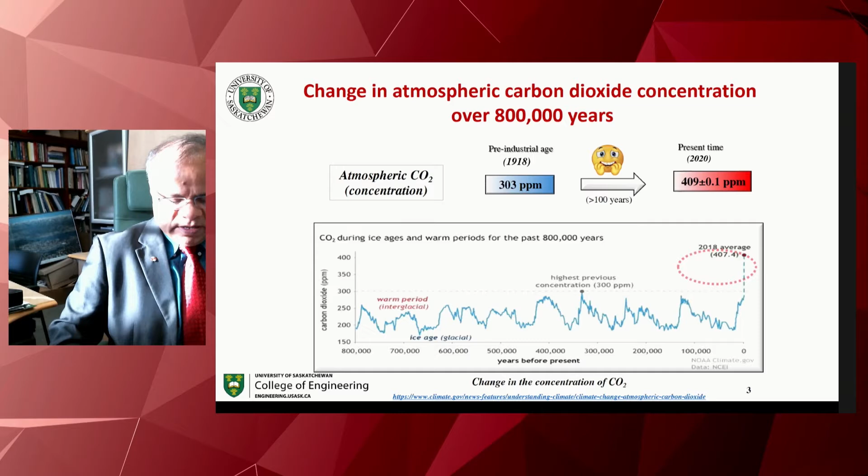If you look more closely at the CO2 concentration and temperature rise, we see that over the last 50 to 60 years there has been a drastic increase in CO2 concentration in the environment, and that translates to a rise in temperature as well.

In the northern hemisphere, during summer months, there is a lot more forest, so due to photosynthesis a lot of this carbon dioxide is sequestered by plants, and the overall CO2 concentration goes down. In winter months there isn't much photosynthesis going on, so CO2 sequestration decreases and CO2 concentration goes up. Nonetheless, there has been a rise in CO2 concentration over time, and also an increase in temperature.

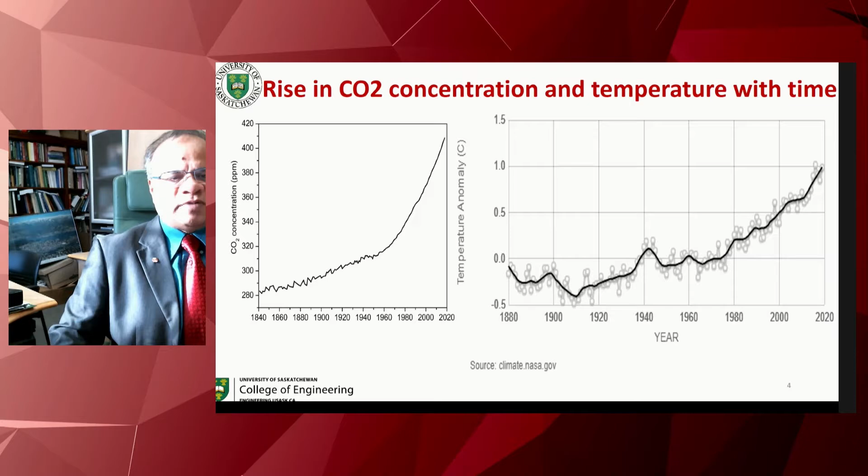This is because of industrialization and more energy consumption around the planet over the last 50 to 60 years or so. Looking at total and per capita CO2 emissions, we find the total emission varies from country to country. For example, China and the USA emit roughly 9 billion and 5 billion metric tons of CO2 per year, followed by India, Russia, Japan, etc.

But when you look at per capita emission, we find United States, Canada, Saudi Arabia, and Australia are on top of the list. We emit a lot more CO2 per capita than many other countries on this planet. This happens because of more usage of petroleum, natural gas, and coal, which are non-renewable energy sources, and their usage going up translates to more CO2 emission.

If you look at the global emission pie chart, China emits roughly 28% of the CO2, the United States about 15%, India about 7%, and the rest of the world outside this pie chart is about 29%.

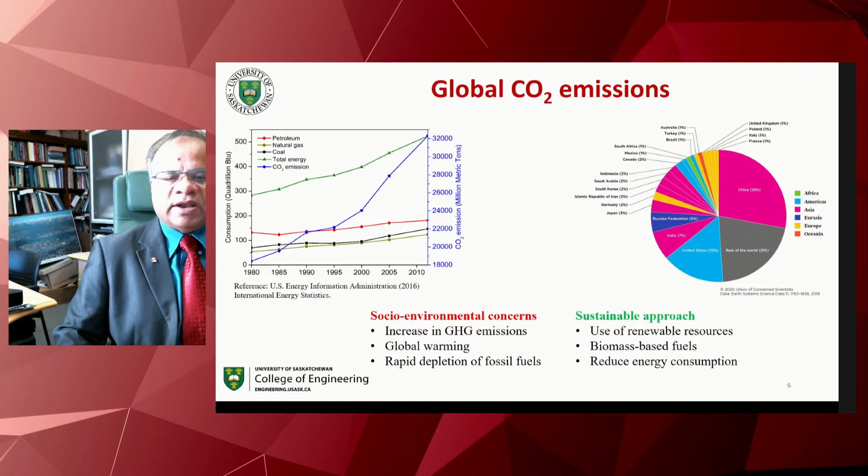This leads to increase in global warming, and also leads to rapid depletion of fossil fuel. So there is a sustainable approach, that is use of renewable resources, bio-based fuels, and also we can look at reducing energy consumption. And when you look at the global fossil fuel consumption, it's quite uneven on the planet.

For example, China, United States, Russia, Canada, and a few other countries use a lot more fossil fuel in total compared to many other countries on this planet. And fossil fuel consumption and CO2 emission go hand in hand. For example, United Arab Emirates, Canada, United States, and Australia consume more fossil fuel, and therefore have more emission of CO2 per capita.

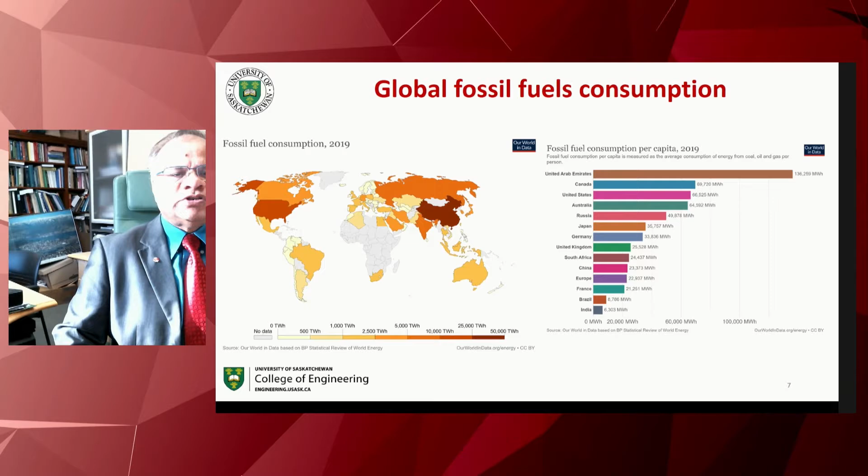When you look at the world's population growth and energy consumption, by about 2100 we'll have more than 12 billion people, up from 7.8 billion at this point. And over the next 20 years or so, we'll have about 77% more non-renewable energy consumption, in spite of growth in renewable fuel production and implementation.

So when you look at this fossil fuel usage, we find that it is non-uniformly distributed over this planet. There is high emission of oxides of sulfur, nitrogen, and carbon, and it accelerates global warming and depletes resources. Over the last 20 years or so, there has been an increase of 0.5 degrees C in the temperature of the globe.

Of all these greenhouse gases, about 81% comes from carbon dioxide, 10% from methane, and another 9% from other sources. Methane has 21 times more greenhouse gas effect compared to carbon dioxide, so we really need to be mindful of CO2 emission and methane emission as well.

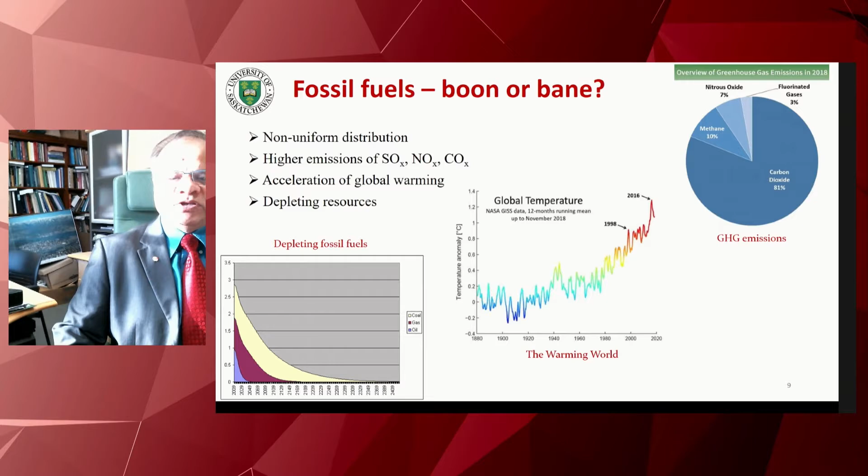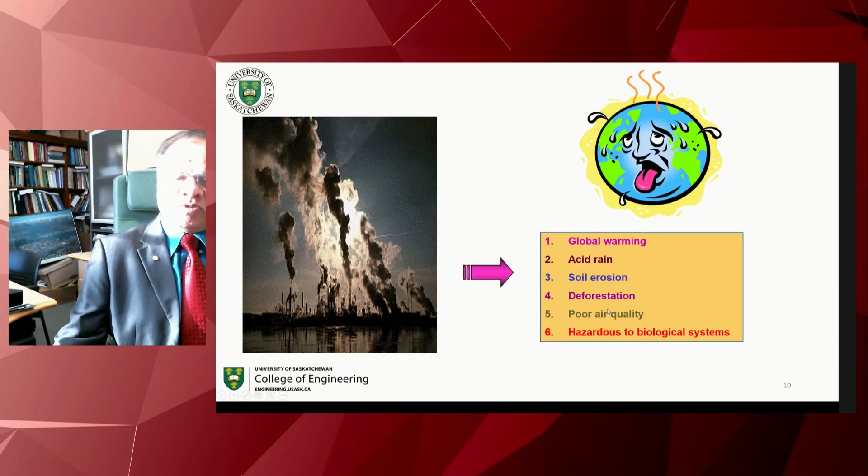If you look at this cartoon here, when we emit a lot of pollutants, including carbon dioxide, to the environment, it not only leads to global warming, it also leads to acid rain, which causes soil erosion, leads to deforestation, and leads to poor air quality. Most importantly, it is hazardous to human and animal health.

So let's look at Canada's commitment to sustainability. Under the Kyoto Protocol, Canada committed to reduce greenhouse gas emission by 6% by 2012, compared to the 1990 level of 461 megatonnes. Now we are at 720 megatonnes of CO2 greenhouse gas production. So none of the countries on the planet could really meet the Kyoto Protocol.

Then in 2015 we had the Paris Agreement. Under this agreement, Canada pledged to reduce its greenhouse gas emission by 30% below 2005 levels by 2030. Developed countries, including Canada, are committed to spending at least $100 billion a year between 2020 and 2025 to help emerging economies deal with the effects of climate change. And none of the developed countries has really spent that kind of money.

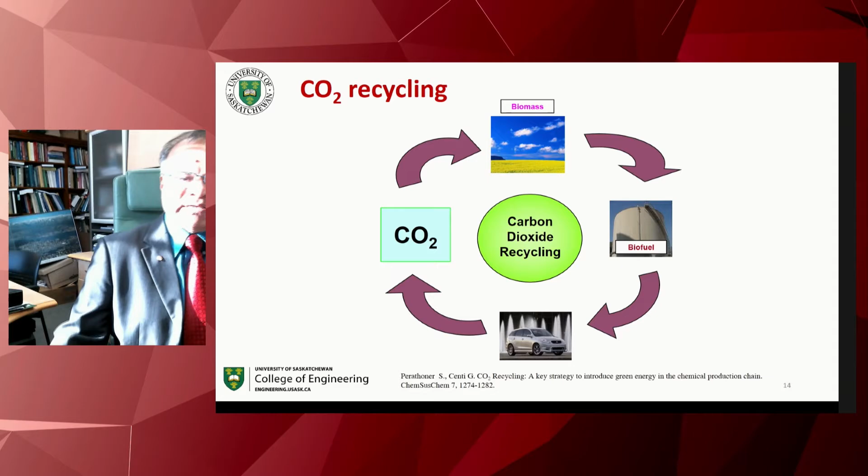So if you look at this particular slide, you see if we use the biomass for energy source, we basically sequester carbon dioxide through photosynthesis to grow the plants, and the plants can be transformed to biofuel to fuel the vehicle, and we can burn that fuel to emit the carbon dioxide that is again taken out by the plant. So this particular process is more or less carbon dioxide neutral process.

And now let me switch to the biomass, a possible solution for world energy crisis. If you compare the petroleum derived fuels with first and second generation fuel, we find that petroleum refinery gives diesel, petrol, kerosene, jet fuel, etc. And when we started working on the first generation fuel about 25 years ago, we find that we can also produce biodiesel and corn ethanol, etc. But we had food versus fuel issues, and it was non-sustainable.

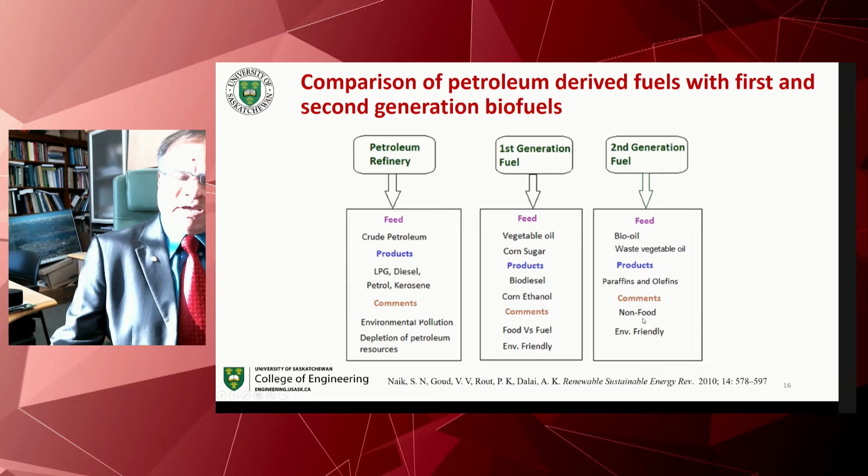And for that reason, we jumped to the second generation fuel from lignocellulosic biomass, where you can also produce biodiesel, ethanol, etc., and we are not competing with the food. And they are both, of course, first generation and second generation fuels are environmentally friendly.

So biomass can be a possible solution for world energy crisis because they are renewable, they are clean, they lead to very low emission, they are carbon neutral, and they're more or less uniformly distributed over this planet in all the countries, unlike the petroleum sources and non-conventional energy sources. And we also have to be very mindful of the food versus fuel issue.

And here we have examples of the agricultural residue, sewage residue, municipal solid waste, animal residue, industrial residues, and forest residues. And in the world, we roughly produce about 220 billion tons of biomass every year. And we have really opportunity to turn those materials to fuel.

And if we don't do that, and we let them rot in the environment, they also produce a lot of methane, which has 21 times more greenhouse gas effects. And we are not doing any good to environment if we don't utilize this resource every year as we produce it.

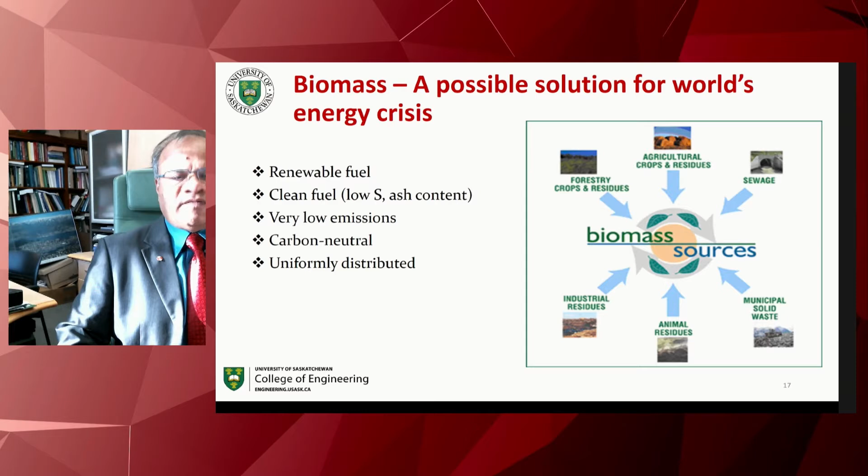So now let me bring your attention to renewable energy and biofuels. If you look at the graph on the left, over the last 20 years or so, we have almost more than doubled the renewable energy generation. What I mean is the hydropower, wind, solar, biomass, etc. And when you look at the biofuel production, we have basically gone from 200 terawatt hour to 1,000 terawatt hour, and that's about a 5-fold increase.

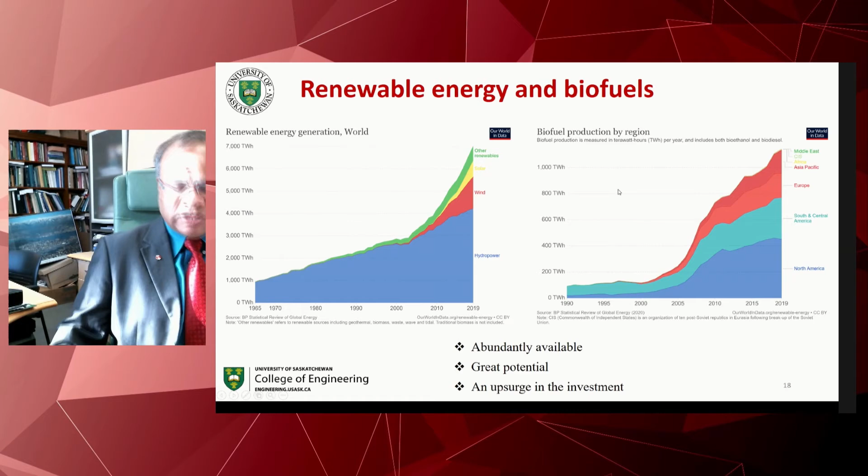And we are also basically looking at producing more biofuels from biomass. And this is only about 15% of the total renewable energy. And I believe that this percentage of energy production from biofuel, from biomass, will increase drastically down the road.

And let me again bring your attention to Canada. We have about 0.5% of world population living in Canada, but we have more than 9% of world forest. And when you look at the annual available biomass from forestry and agricultural sector, it's about 143 million tons of carbon per year.

That can translate to more than 1,500 terawatt hour of energy. And right now in Canada, we are producing roughly 16 terawatt hour of energy. So we have opportunities to go more than 25-fold increase in biofuel energy production with the amount of biomass available in this country, in our country.

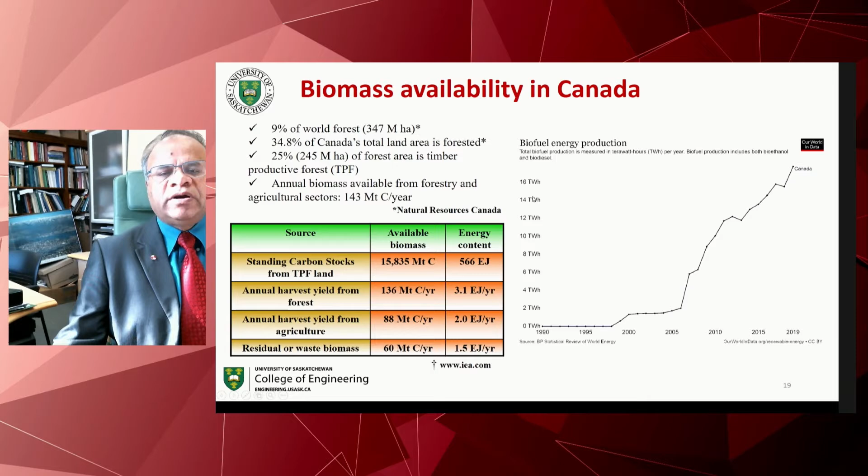And the residual and waste biomass, you can see that about 60 million tons that can translate to more than 400 terawatt hour, and that is also quite substantial. And if you look at the renewable fuel standard and low carbon fuel standard in Canada, the federal government has mandated 5% ethanol and 2% biodiesel. In Canada, we use roughly 25 billion liters of diesel fuel every year, and at 2%, we need about 500 million liters of biodiesel.

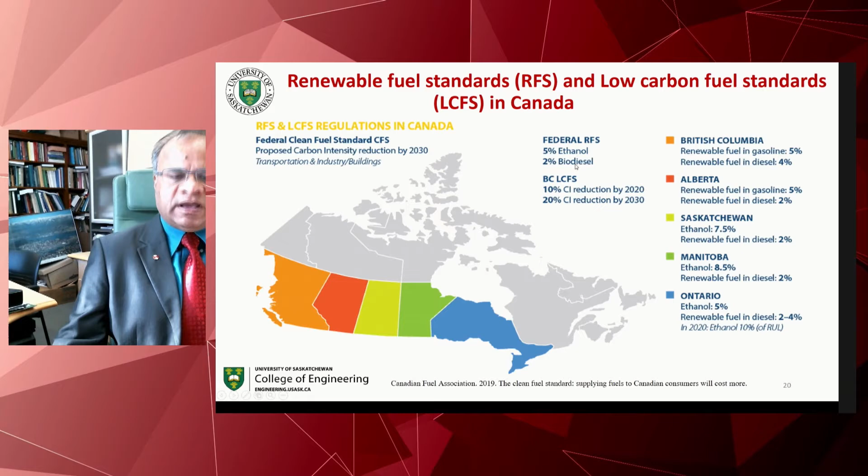And there are 21 companies in this country, in our country, which produce more than 450 million liters of biodiesel. And when you look at all these different provinces, they are more aggressive than the federal mandate. For example, in Saskatchewan, we have a mandate of ethanol for 7.5% as compared to 5% by federal government. And if you look at Ontario, the renewable fuel in diesel varies up to 4% as compared to 2% mandate by the federal government. And these are all really, really good signs.

And what is the trend in growth of biofuel sector? We are more targeting the liquid fuel. Why? Because they have more energy density. They can serve the fuel for jet engines. And by the way, the aviation industry emits about 2% carbon dioxide of total emissions in the world. So if you put more biofuels in the jet engine, then we'll be that much more sustainable and reduce the CO2 emission.

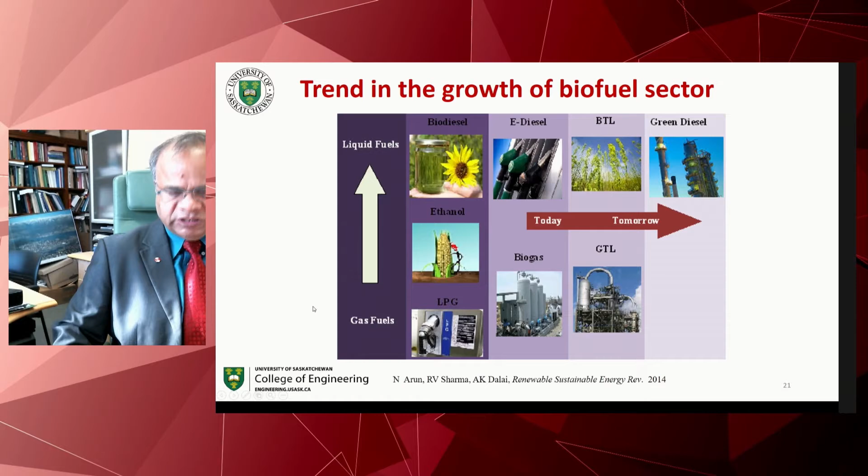Also looking at the production of this liquid fuel more from lignocellulosic biomass than food sources. So what is lignocellulosic biomass? It basically contains cellulose, hemicellulose, lignin, extractives, and these are present in grass, wood, agricultural residue, etc.

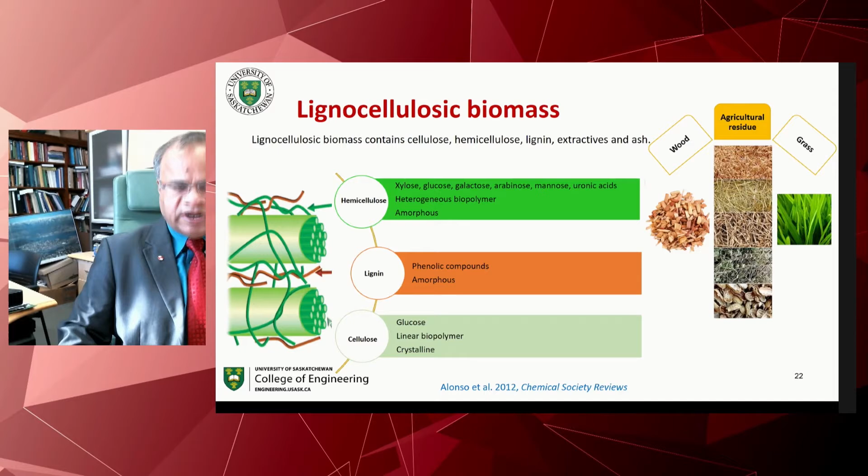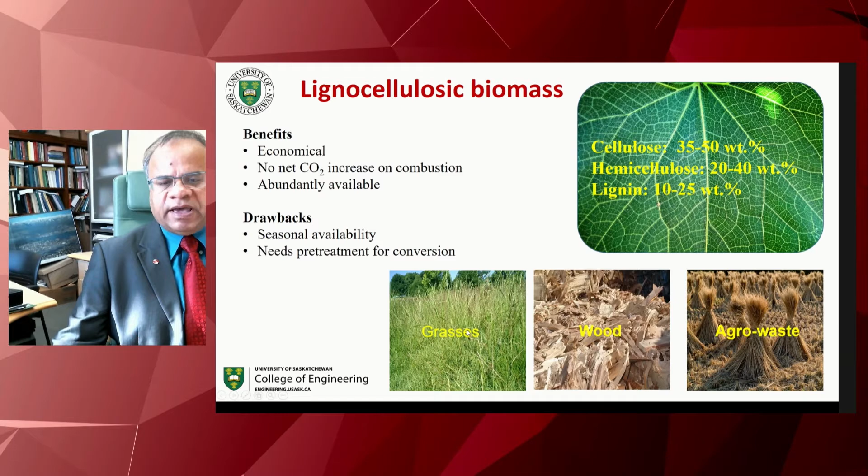In case of lignocellulosic biomass, we have about 35 to 50% cellulose, 20 to 40% hemicellulose, and 10 to 25% lignin. By using this biomass, we can economically benefit, there's no net CO2 increase on combustion, and they're abundantly available. The drawbacks are they're seasonally available and need pre-treatment for conversion. Examples are energy crops, wood, and agro waste.

So what is an energy crop? It's any plant grown as a low cost, low maintenance harvest used for making biofuels or combusted for its energy content to generate heat or electricity. They are fast growing, short rotation, and high yield. They will be able to grow in marginal or degraded land. They require less intensive agricultural practice, and there is no competition with food crops for nutrients or sunlight.

With annual availability of energy crop in Canada up to 17.3 million tons, we have a potential to produce about 4.7 billion liters of ethanol per year from this material. Not only can we use it in-house, the Canadian mandate can go from 5 to 10% ethanol, but we also will be able to export a lot of this lignocellulosic derived ethanol to other parts of the world and make lots of money as well. Now let me switch the discussion onto biomass conversion technology for clean, sustainable energy production.

So there are three different pathways: chemical conversion, biochemical conversion, and thermochemical conversion pathways.

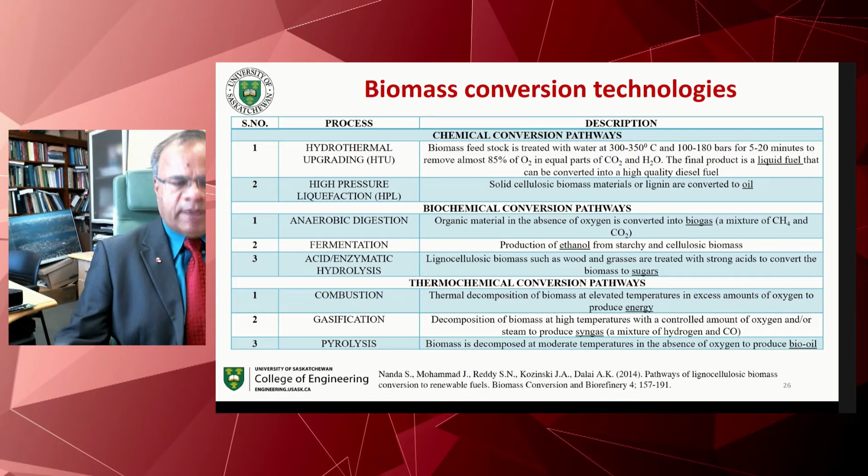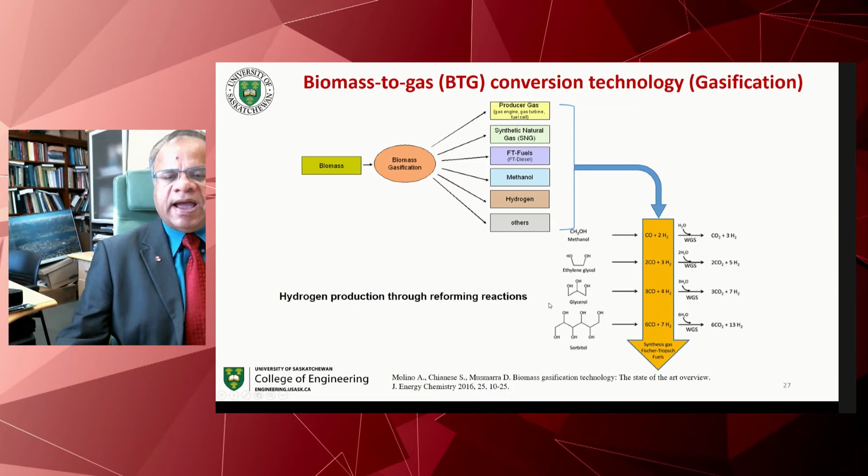Once we gasify the biomass into different components, we can use the reforming reaction by adding some catalyst and water to produce high quality hydrogen from these intermediate products.

In case of biomass to liquid conversion technology, let's talk about pyrolysis. It's basically a thermochemical decomposition process at high temperature in the absence of oxygen to produce oil, biosolids, and gas. It's divided into slow, fast, and intermediate processes depending on the residence time of biomass in the reactor, which can vary from seconds in fast pyrolysis to an hour in really slow pyrolysis. In this process, we get different amounts of oil, char, and gas depending on the temperature and the residence time of the biomass in the reactor.

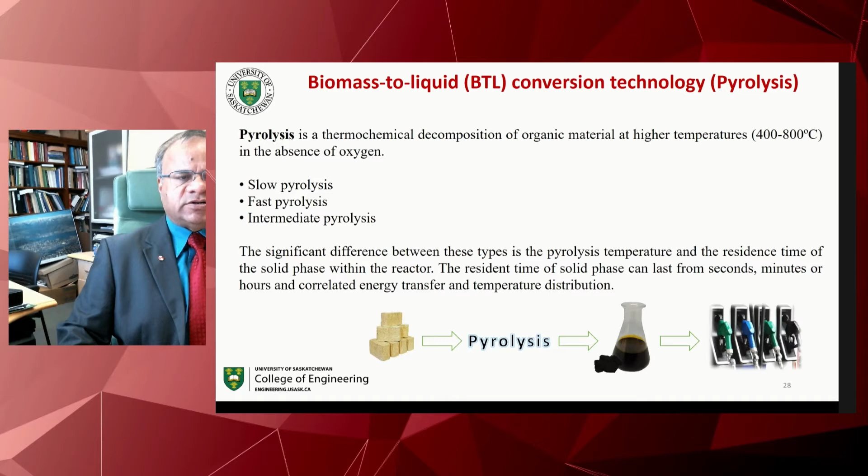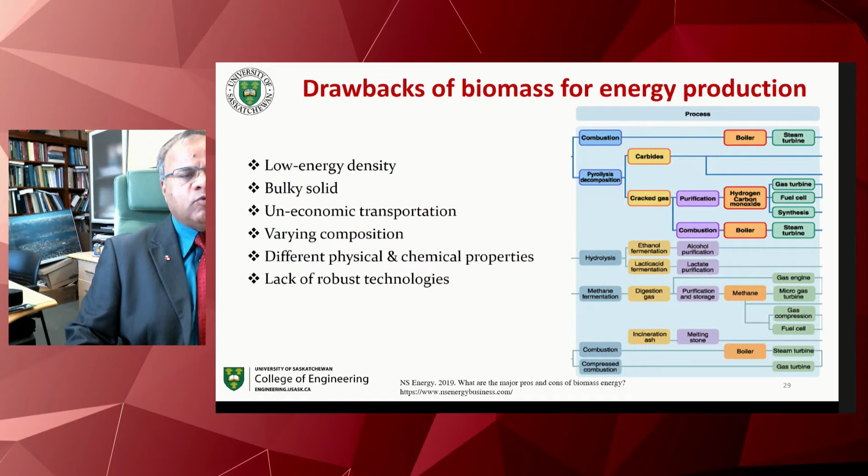Of course, there are many drawbacks of biomass for energy production. They have low energy density, they are bulky solids, therefore uneconomical for transportation over long distances, they have varying composition, different physical and chemical properties, and in many cases there is a lack of robust technology mostly in developing and underdeveloped countries.

So like any other industry, the biofuel industry depends on the feedstock, on processability, and also many other factors, including government incentive and interest from academia and industrial activities.

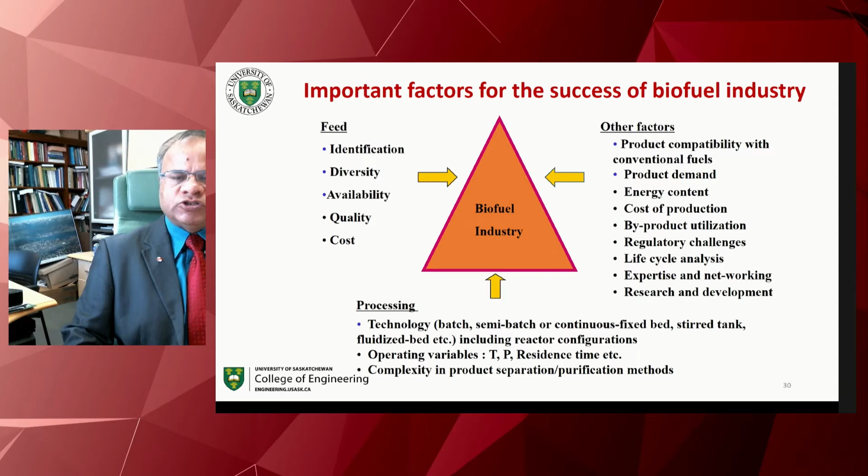Now let me switch to supercritical water gasification and hydrothermal liquefaction challenges and opportunities.

If we are not familiar with supercritical water gasification technology, basically at a critical point, which is about 374 degrees C and 22.1 megapascal, beyond this the water is called supercritical water. In this case, the ion product, density, dielectric constant, viscosity, everything is very, very different than that of water. So what is the advantage of using supercritical water gasification, even if it's a bit energy intensive? Some of this energy can come from biomass itself and also from solar and nuclear sources.

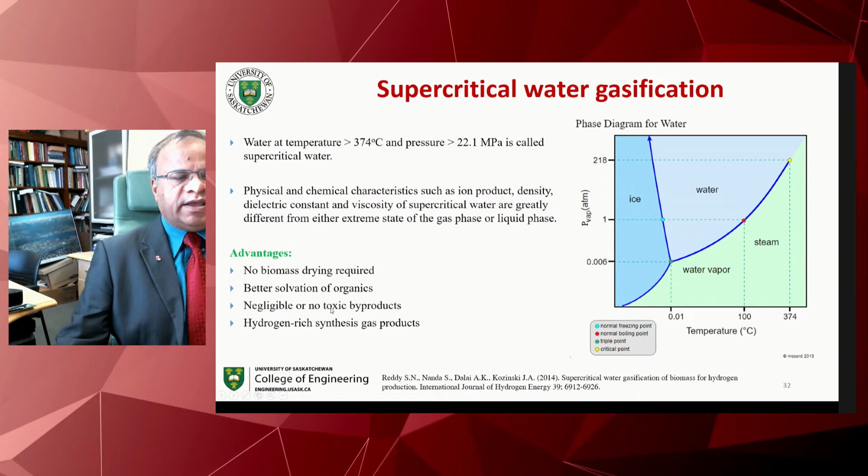The advantages are that no biomass drying is required, because drying is expensive, and they have better solvation properties, negligible or no toxic byproducts, and they produce hydrogen-rich synthesis gas.

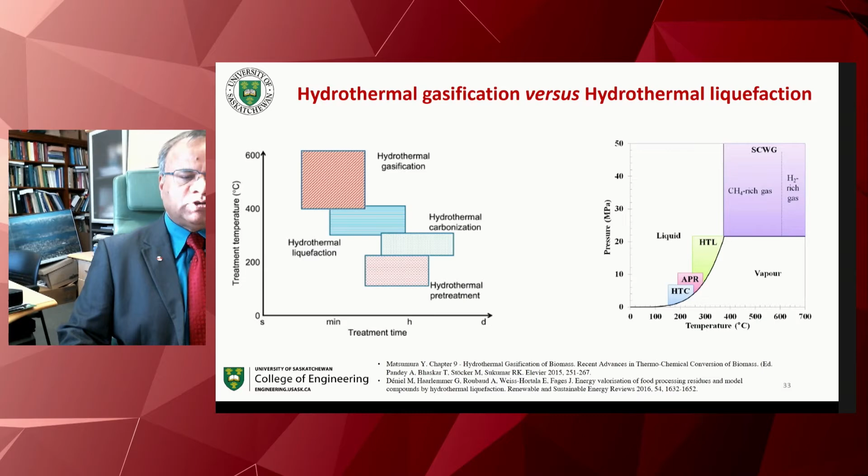On the left, we see temperature versus treatment time and how hydrothermal gasification leads to production of more gas. Hydrothermal liquefaction produces more liquid, hydrothermal carbonization produces more biosolid like biocoal, and hydrothermal pretreatment removes moisture and volatiles from the biomass to increase its heating value and reduce transportation cost to some extent.

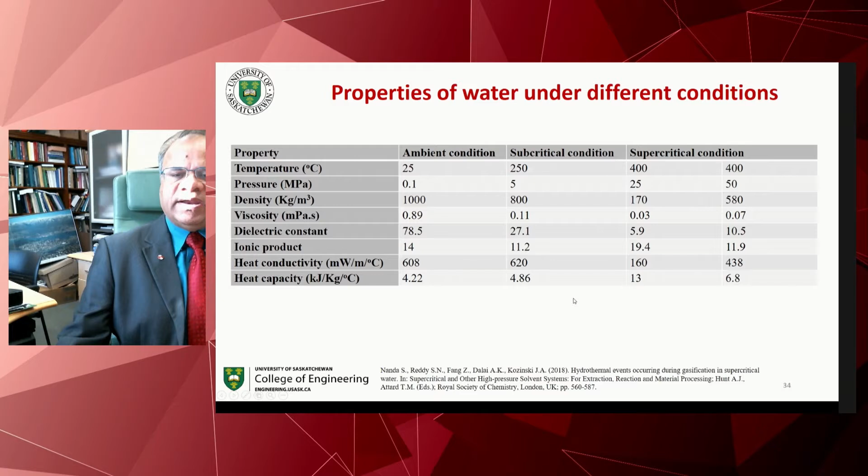We basically rely on variation of these properties to convert biomass to liquid or gas as needed, so we use different kinds of reactors.

When we started the work about 20 years ago, we looked at the different phase behavior in a hydrothermal reactor using a diamond anvil cell at the Canadian Light Source.

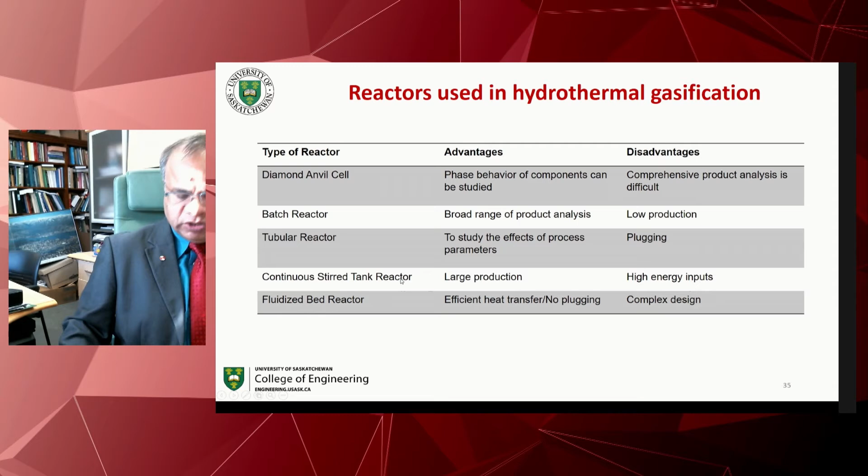We have been using batch reactors and tubular reactors to look at the product yield and conversion of biomass to these different products. Of course, continuous reactors, fluidized bed, and stirred tank reactor can be used when you scale up this process to industrial production. Now let me switch to our own research on clean energy production from biomass.

Over 25 years ago, I was trained as a petroleum engineer. When I joined this university in 1996, I was asked to generate research on clean energy production from biomass, with the Canada Research Chair position.

So I looked into this, and in those days, clean energy production from biomass was not on the radar of the province or the federal government, and we really have come a long way. At that time, there was no funding available. Now there is plenty of funding available, a lot of passion to contribute to this research, and now we also get very high quality students to work with us.

Now let me talk about the hydrothermal liquefaction process. This is basically thermal depolymerization of biomass at relatively high temperature and pressure, with or without catalyst, to produce bio-oil. In this process, high moisture, low energy material is converted to low moisture, high energy material.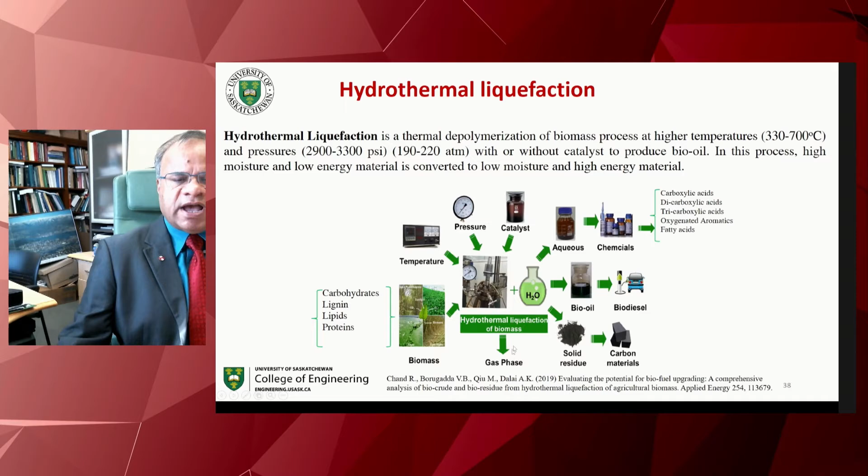These chemicals can be extracted. Bio-oil can be converted to biodiesel, and solid residue can be converted to high carbon, high quality carbon material. We also get gases that can be burnt on site to supply the energy we need for this process.

In this particular example, we are looking at about 15% non-edible agricultural material, adding 85% water. If it has some inherent water, we just add balanced water to the process and increase the temperature and pressure. In a short period of 1 hour, we get 4 different products: about 85% aqueous, 5% bio-oil, 8% solid residue, and 2% gas phase.

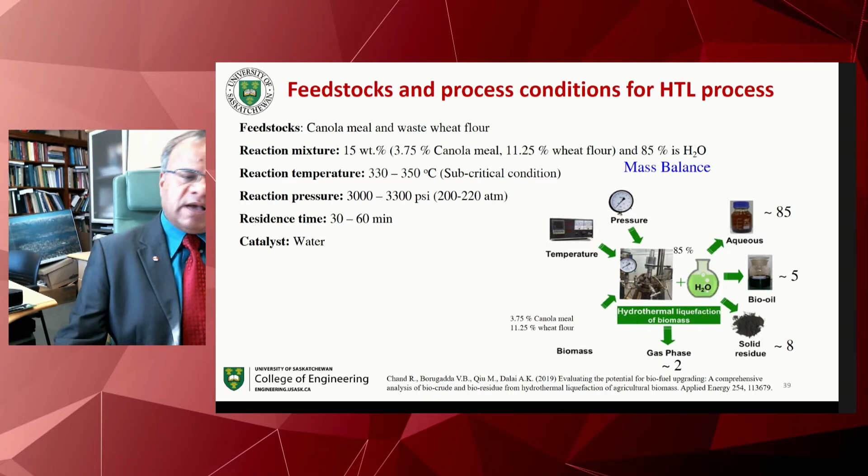I just wanted to bring to your attention that when work started on petroleum in Alberta, for example, the oil sands had only 10% bitumen, and with contribution from the government, about $800,000 was invested around 1975.

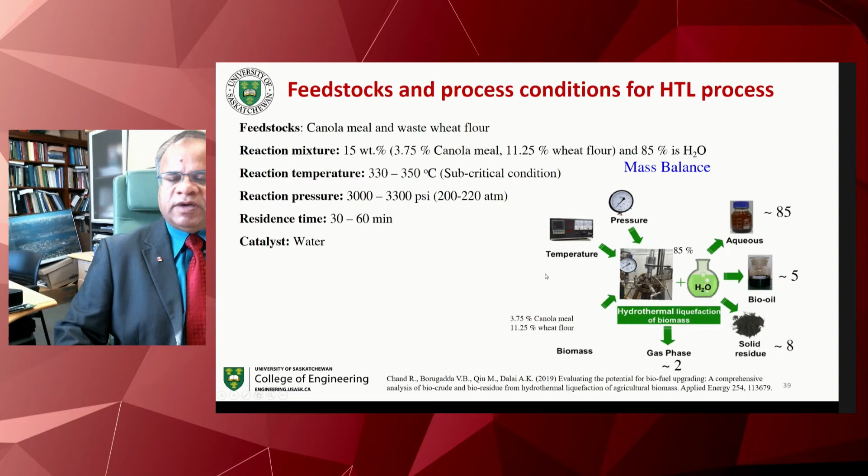Now it has led to a billion-dollar industry. In this particular technology, when you look at only 15% biomass that we are putting in, we are getting 5% bio-oil, which is about one-third of that material going into the oil, which is very useful to transform into transportation fuel.

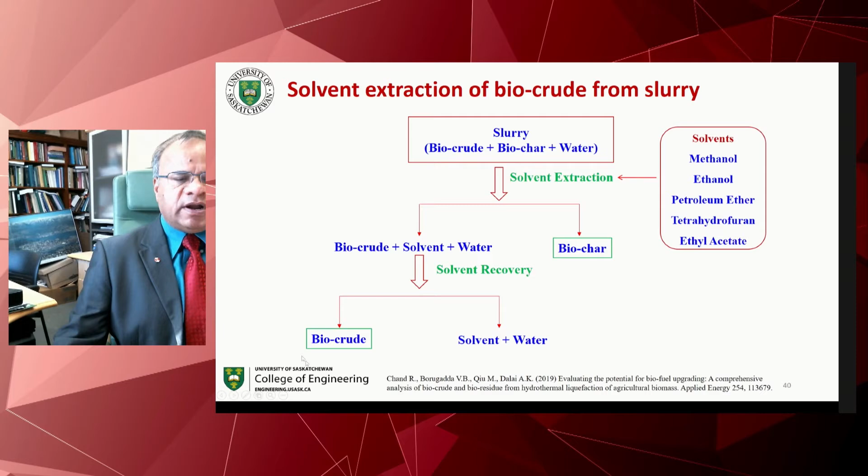So once you get the bio-crude, we add different solvents to separate the biochar from the bio-crude, solvent, and water. By distillation, we can separate the solvent and water and then produce the bio-crude that we need to upgrade.

This is a very interesting slide in the sense that the heating value of this crude is about 36 to 40 megajoules per kilogram, as compared to 14 to 18 megajoules per kilogram for the biomass. It has a low oxygen content, about 9%, has very negligible ash content, and it's oxidatively stable up to 3 months at room temperature.

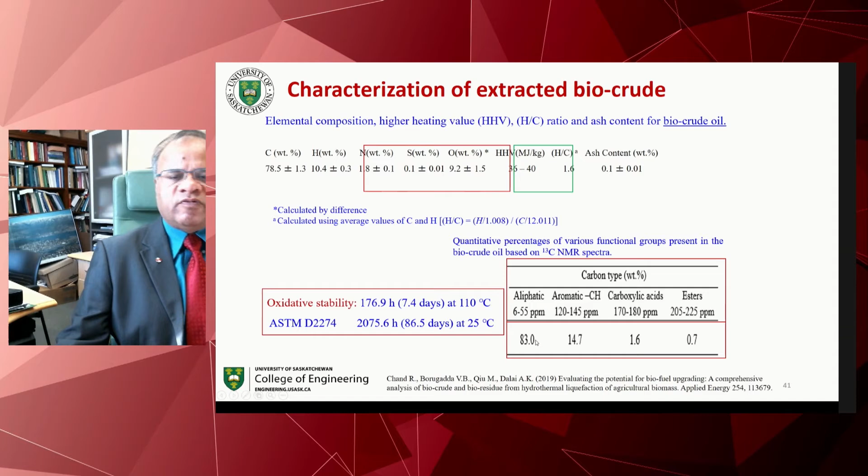All this high calorific value is because of the large amount of aliphatic hydrocarbons present in the bio-oil. When you look at the boiling point distribution and compare this with the petroleum fraction, we find that more heavy gas oil and light vacuum gas oil materials are present, the range of hydrocarbons present in this bio-oil, and that's really a good sign.

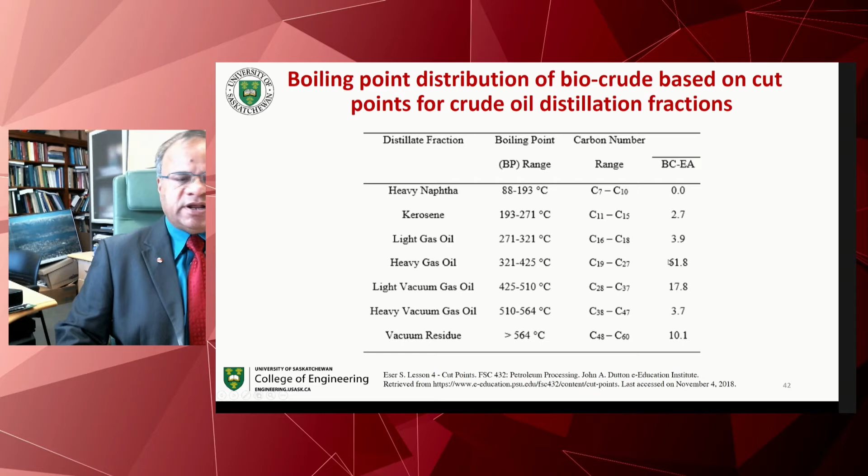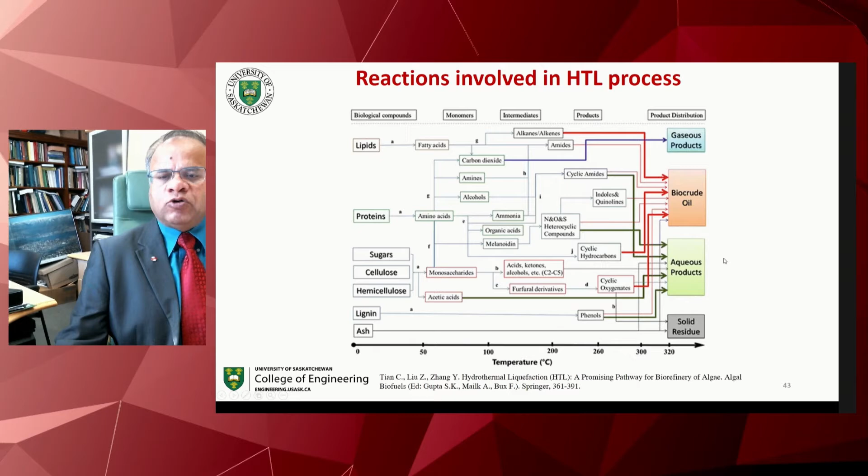This is a bit complex, but just wanted to bring to your attention that many reactions take place in the hydrothermal liquefaction process in a short period of 1 hour, when lipids, proteins, sugars, cellulose, hemicellulose, lignin, etc. go through this particular process. There are many intermediates, but nonetheless, at the end, we get gaseous product, bio-crude oil, aqueous product, and biosolid, or solid residue.

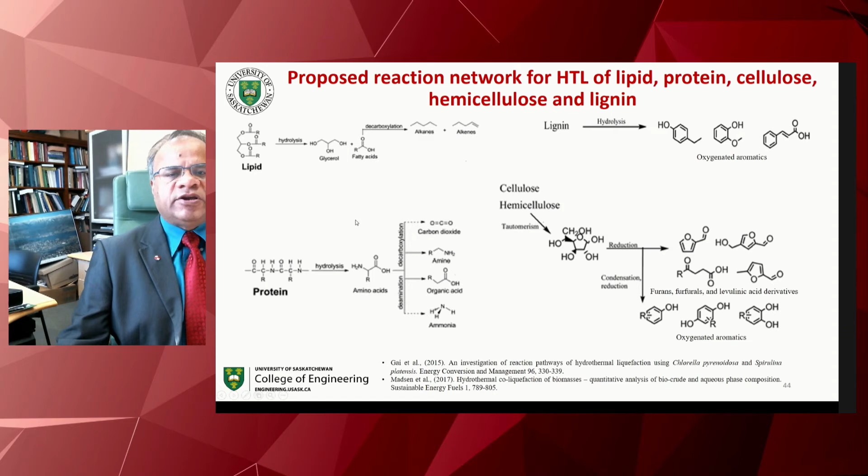In this particular work, we produce basically alkenes, organic acids, oxygenated aromatics, furans, furfurals, etc., from the lipid, lignin, cellulose, hemicellulose that are present in the lignocellulosic biomass.

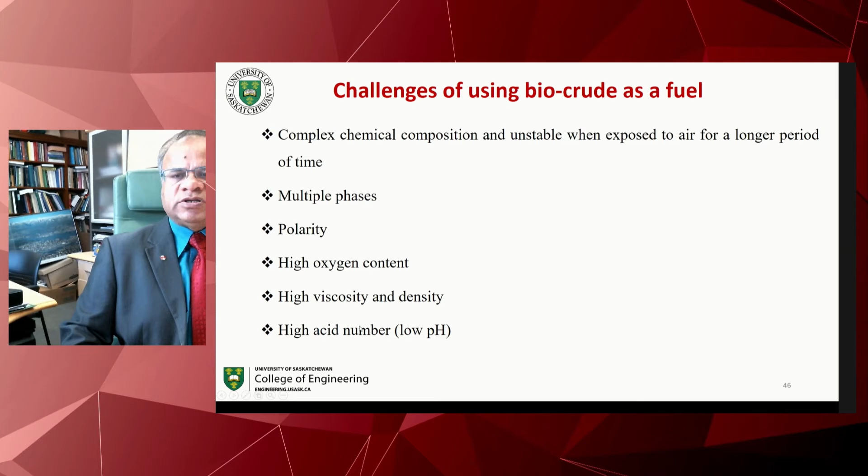Of course, there are many challenges of using bio-crude as a fuel because they have complex chemical composition, multiple phases, different polarity, high oxygen content, and high viscosity and density because of the aliphatic hydrocarbons, and then high acid number because of the presence of carboxylic acid in this material. So we have to overcome these challenges.

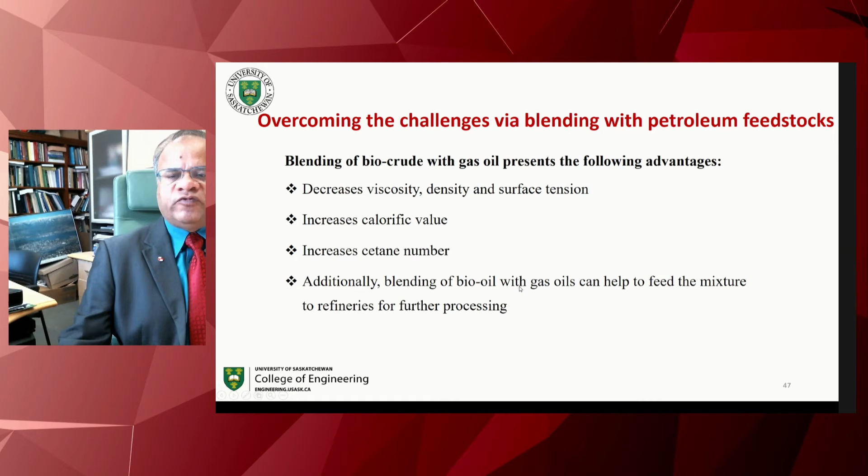What we can do is basically blend it with petroleum feedstock and send it to a petroleum refinery for further processing. When you blend it, it can decrease the viscosity, density, and surface tension. It can increase the calorific value. It can increase the cetane number. And also blending, as I mentioned, can help feed the mixture to refinery for further processing.

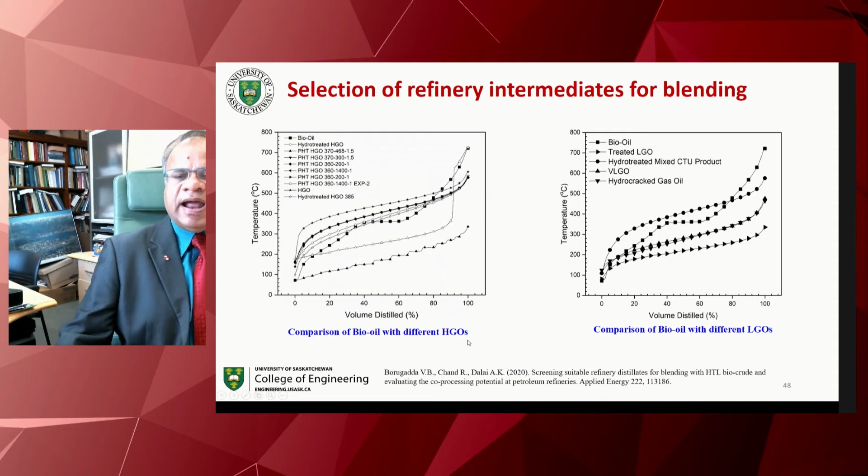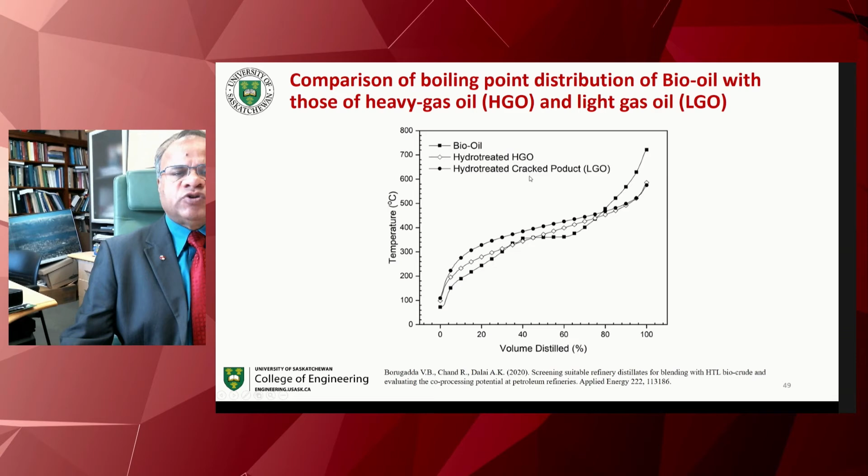For that reason, we looked at different refinery intermediates and found that the boiling point distribution basically falls in different heavy gas oil and light gas oil ranges of materials, as you see in this slide. When we summarize it and look more closely, we see that the bio-oil distribution with the solid square in this graph matches very closely with the hydrotreated heavy gas oil or hydrotreated cracked product from petroleum sources.

We also looked at blending of the bio-oil with heavy gas oil, and we found that we can blend up to 10% in 90% heavy gas oil at 120 degrees C in about 12 hours. We also can blend at different amounts of bio-oil at 120 degrees C at different timings as well. This is really a good sign that we can create a homogeneous mixture of bio-oil with heavy gas oil and feed it into a refinery for upgrading.

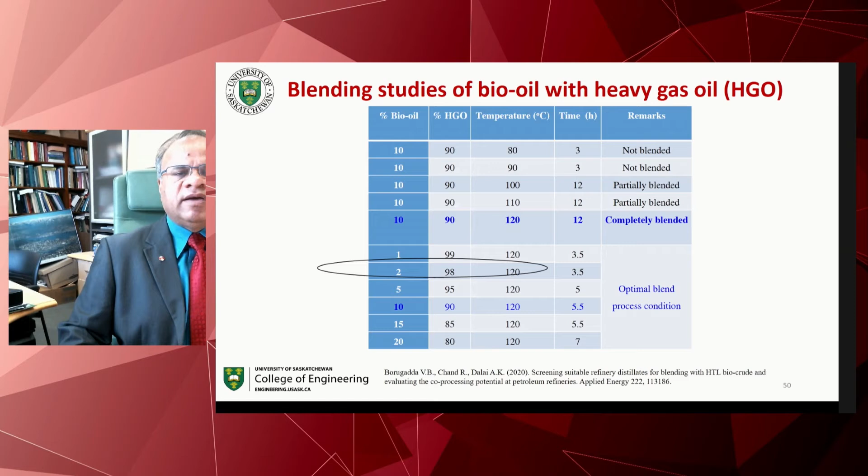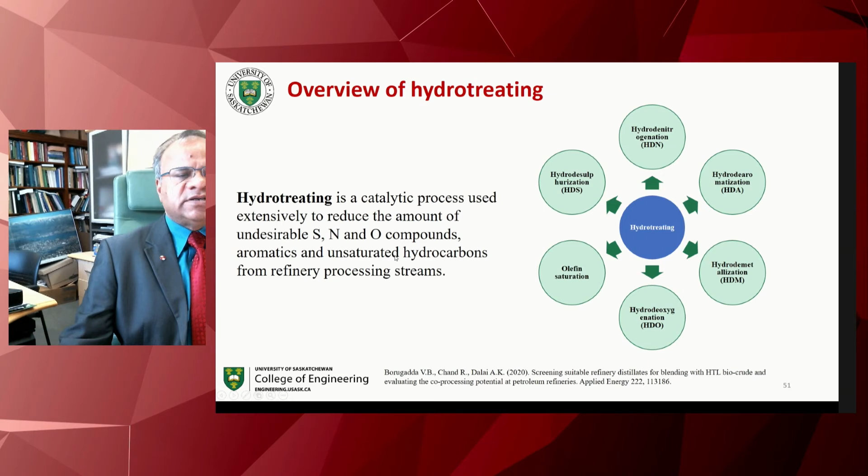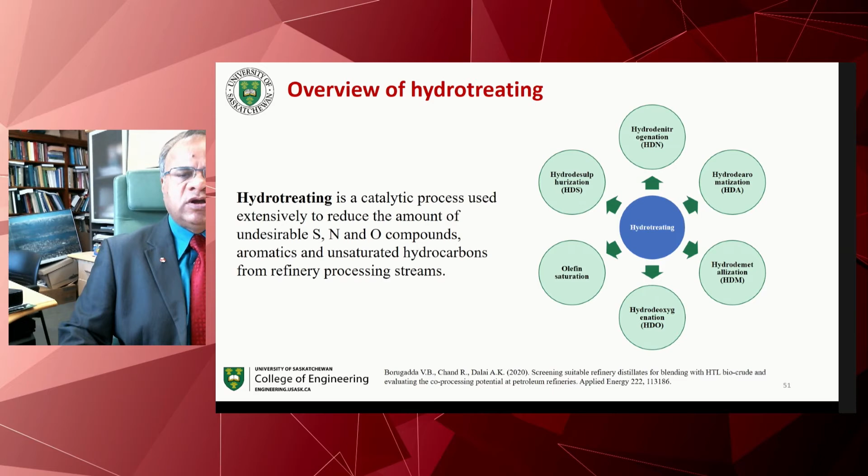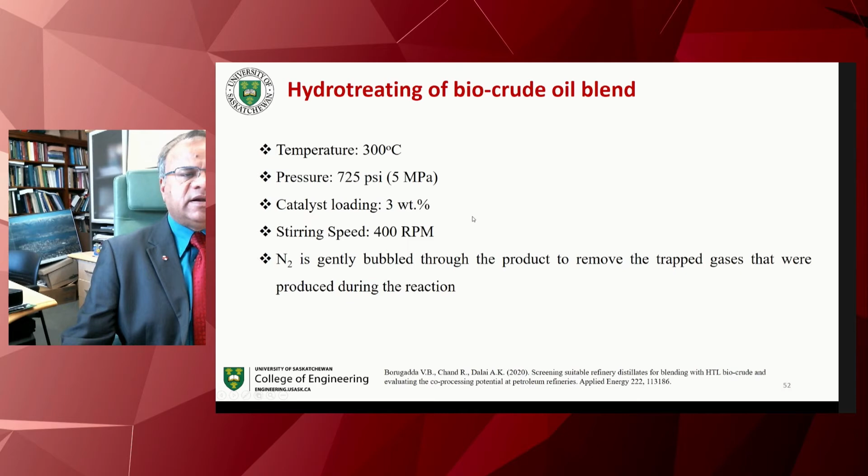I also wanted to share the distillation curve for a hydrotreated blend for the product. We find that when you use the commercial catalyst, we are able to achieve about 40% biodiesel and 3% biogasoline from this product.

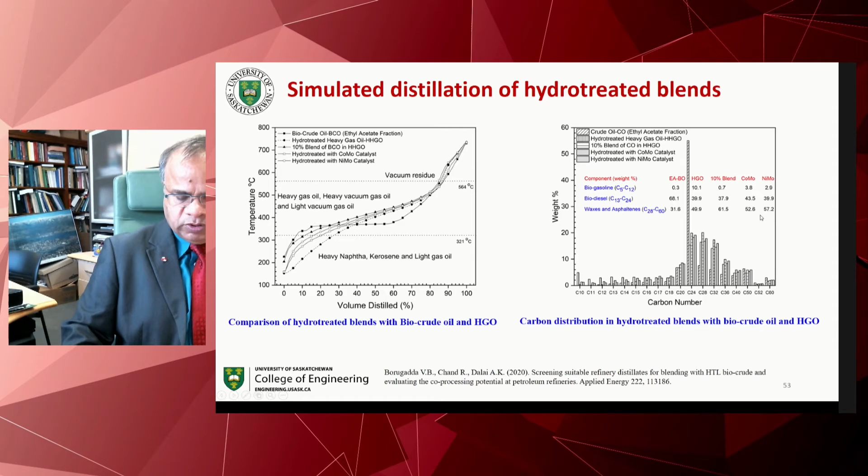And the rest we need to hydrocrack to bring it to smaller molecular weight material in the range of biogasoline and biodiesel. This table shows the results on the hydrodeoxygenation of the bio-oil, or 10% bio-oil in heavy gas oil. The last row shows we are using our own patented catalyst to remove about 60% oxygen from this blend. We are also able to remove about 15 to 50% sulfur and about 10% nitrogen from the bio-oil as well.

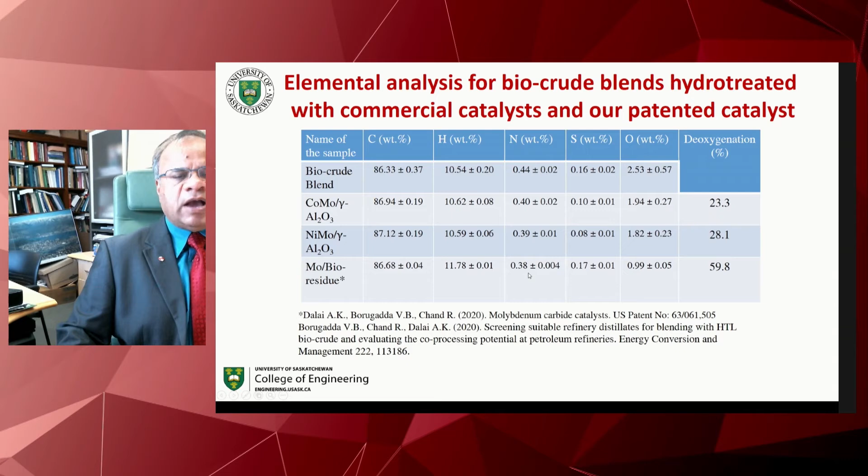Now let me switch to biomass-based hydrogen as a clean and sustainable energy. As you see in this graph, biomass-derived hydrogen is basically more sustainable and clean as compared to the ones coming from fossil fuel.

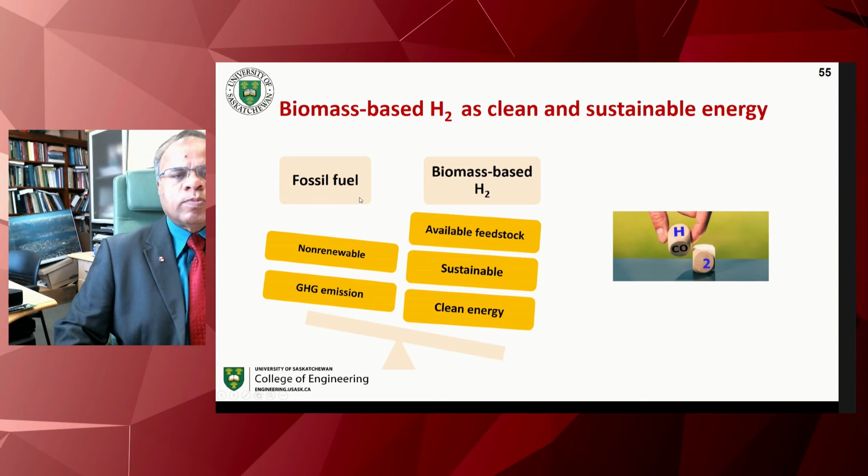As part of this activity, we have been using a hydrothermal gasification technology for sewage sludge, municipal solid waste, food waste, animal manure, forestry biomass, agricultural biomass, and mixed plastics to produce high quality hydrogen. When you put the biomass in a supercritical water gasification reactor, in the presence of catalyst or without catalyst, we convert that to hydrogen, methane, carbon monoxide, and carbon dioxide. With the reforming reaction, we can produce high quality hydrogen for different applications.

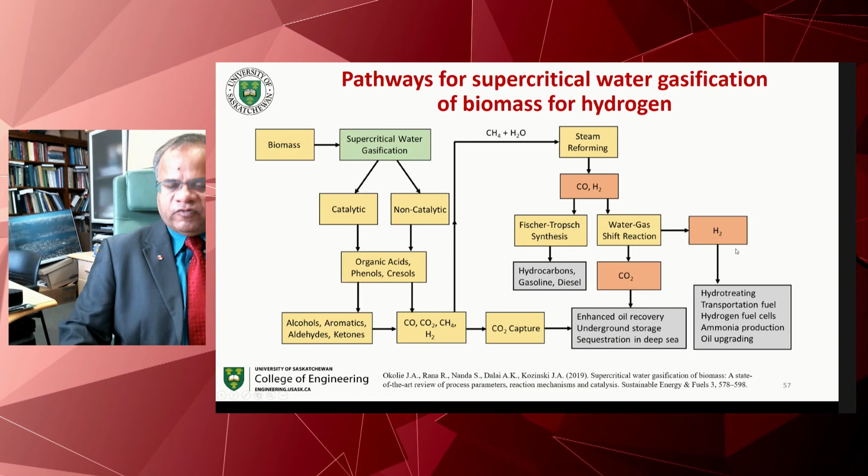The reactions are very complex, and it's very difficult to be selective to hydrogen production, but nonetheless, with catalysts such as nickel-based catalysts, we can mobilize the process to produce more hydrogen as compared to other products.

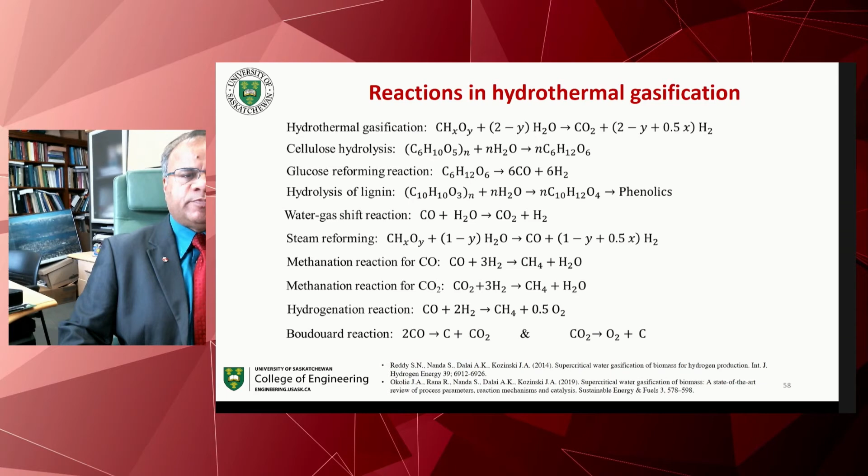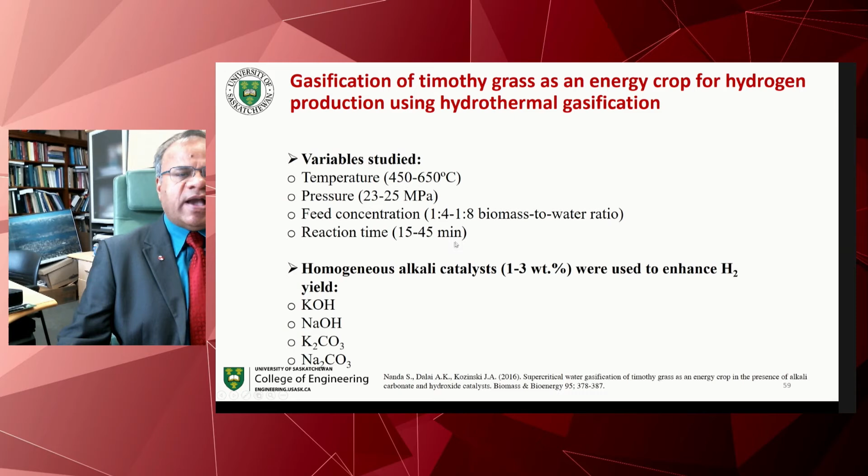In this particular work, we basically used Timothy grass, which is an energy crop. Canada has more than 17 million tons of this energy crop, and we wanted to tap that to produce high quality hydrogen. So these are some of the variables and some of the catalysts that we used in this particular process.

This graph shows that when you use carbonates and hydroxides, basically alkali materials, with potassium carbonate we produce potassium formate, and that helps the water gas reaction to produce more hydrogen. In case of potassium hydroxide, we are able to produce more as well. With sodium hydroxide, we are producing more methane. Methane also has a very high calorific value, and hydrogen is a clean gas.

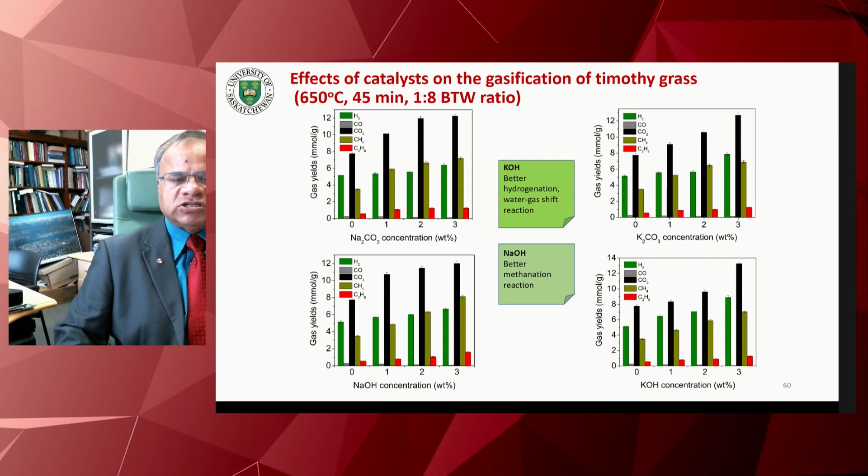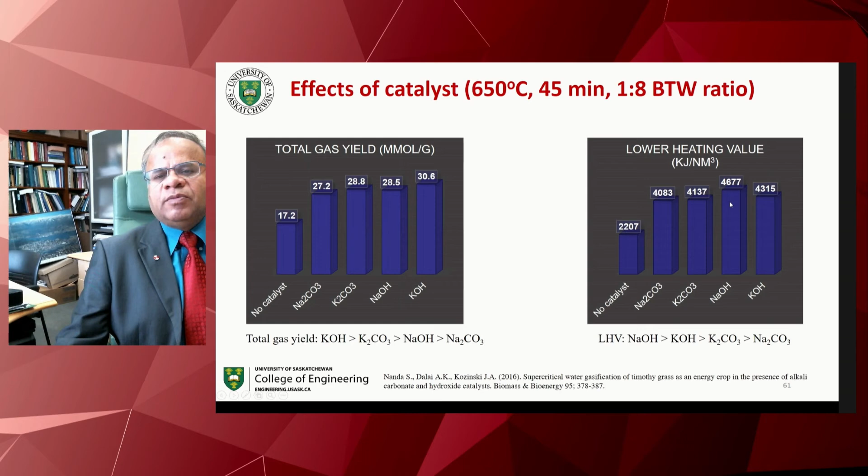It's basically about manipulating the process and the loading of these materials to produce high quality gaseous product. In this slide, we see that potassium hydroxide gives a lot of gas, for example. If you take 1 kg of the Timothy grass, we can produce about 750 liters of gas, and out of that, more than 200 liters is hydrogen. We are also able to produce a high heating value gas by producing more methane.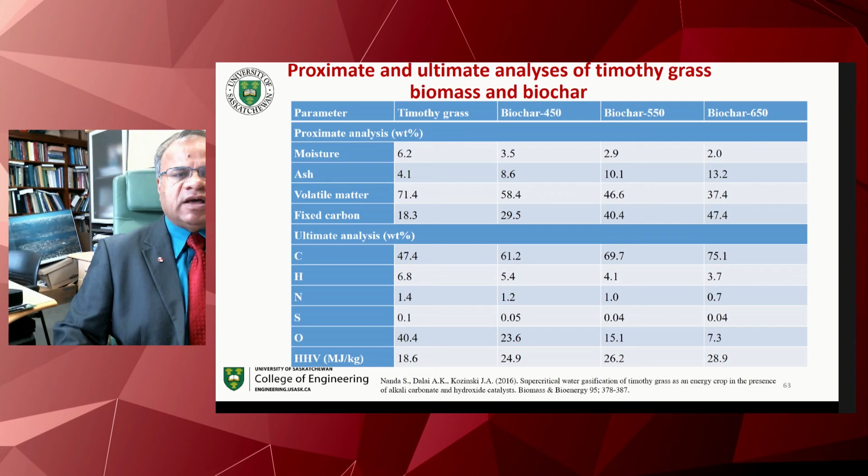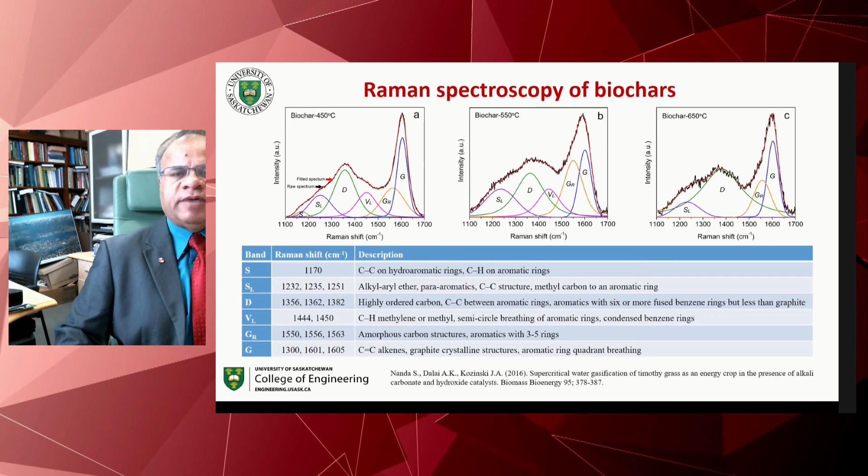We also used Raman spectroscopy for biochar to look at the aromatic nature of the material, and this D by G ratio, which gives the aromaticity, increased with increasing temperature for hydrothermal gasification, making it more aromatic. We also have other different functional groups present in this biochar, which are very much required for many further applications.

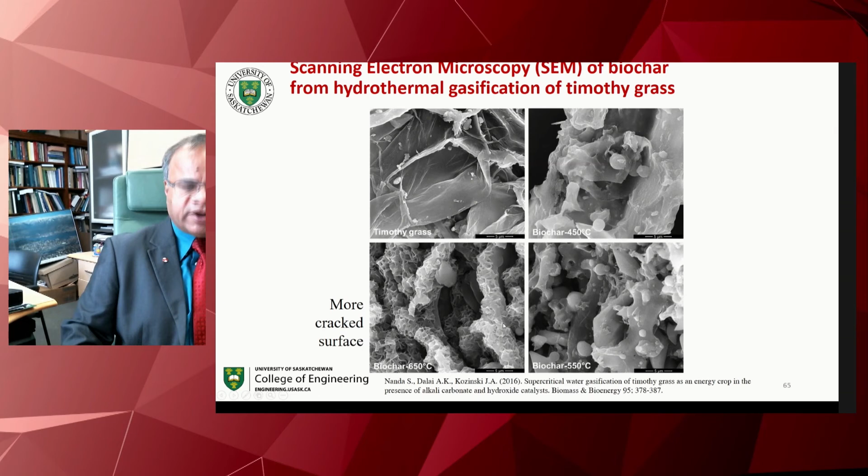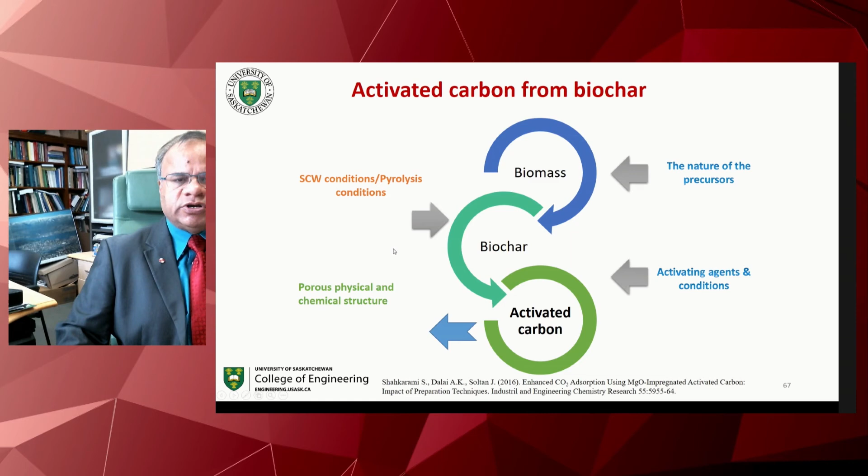For example, we can sell 1 pound of activated carbon for $2 per pound, as compared to $40 a ton for lignocellulosic biomass.

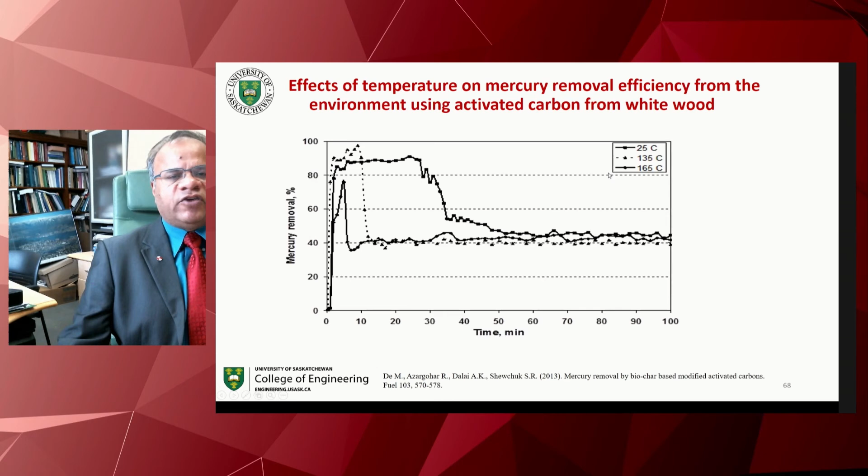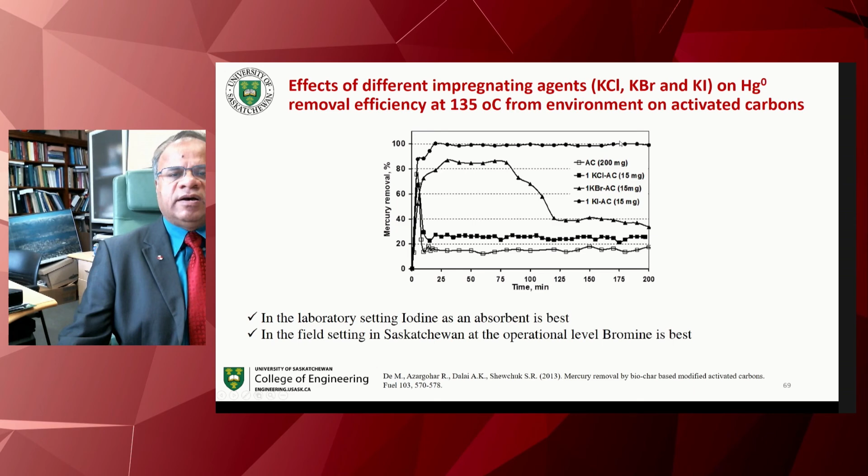So we wanted to remove this mercury with activated carbon, and we found that at different temperatures it behaves differently in mercury removal efficiency. We also added halogens, and found that using 1% potassium iodide on the activated carbon, we can remove 100% of mercury from the stack.

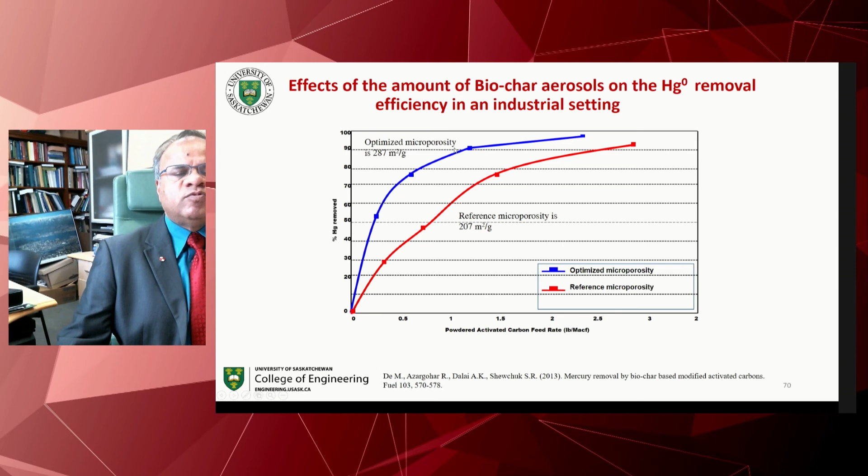In industry, we applied this for about 10 years. SaskPower has spent $30 million and injects activated carbon aerosols at about 135 degrees C. With commercial material, they apply 1 pound per million cubic feet of flue gas to remove 60% mercury. But with our material, 1 pound injected into the flue gas at 135 degrees C, cooled down from maybe 1200 degrees C, can remove about 95% of mercury at the source.

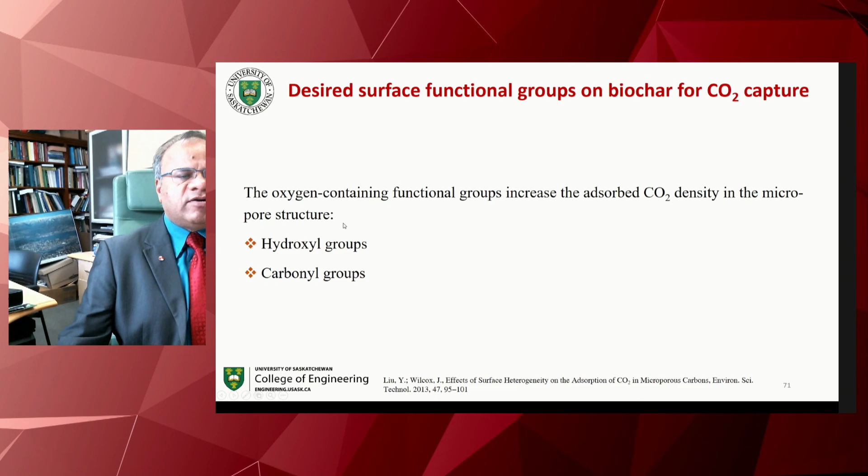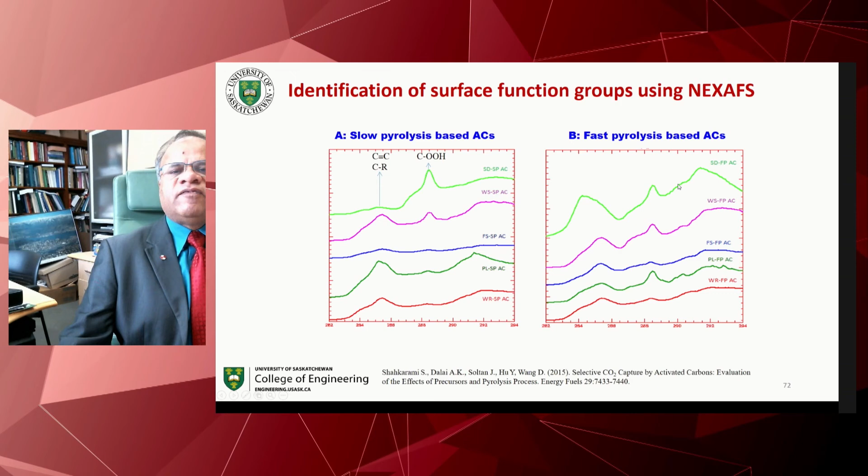We also looked at using this material for carbon dioxide capture from the environment, and found that the hydroxyl and carbonyl groups are very useful. We did surface functional measurements with near-edge X-ray absorption fine structure at the Canadian Light Source located on our campus, and found that the slow pyrolysis process produces better material.

In the slow pyrolysis process, we looked at sawdust, flaxseed, flax straw, poultry litter, wheat straw, and willow ring, applying different materials to produce high quality activated carbon. With sawdust, we were able to increase the surface area to more than 1,200 square meters per gram, and remove about 78 grams of carbon dioxide for each kilogram of material applied in the adsorption process.

So let me summarize and conclude my presentation. Though 220 billion metric tons of biomass is available worldwide every year, the development and utilization of biomass conversion technology for clean energy production has not yet been sustainable enough to meet the Paris Accord.

Bio-crude oil obtained from HTL technology has a high gross calorific value, low ash content, low amount of oxygen, low moisture content, high oxidative stability, and gives a higher percentage of biodiesel range hydrocarbons. With suitable blending and commercial catalysts, bio-oil is suitable for transportation fuel production.

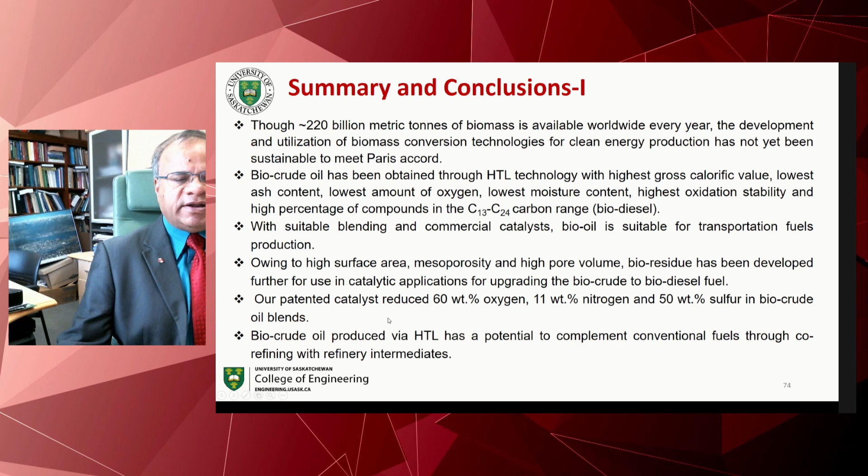We have also produced very high quality bioresidue for different applications. Our patented catalyst reduced 60% oxygen, 11% nitrogen, and 50% sulfur in the bio-crude oil blend. This bio-crude oil, produced from the hydrothermal liquefaction process, has potential to complement conventional fuels through co-refining with refinery intermediates.

Process parameters such as temperature, reaction time, and catalysts are critical for high biomass-derived hydrogen yield and total gas yield with greater lower heating value gas via supercritical water gasification technology. We have also shown that we can use this for mercury capture and CO2 capture, which is very useful for environmental pollution control applications.

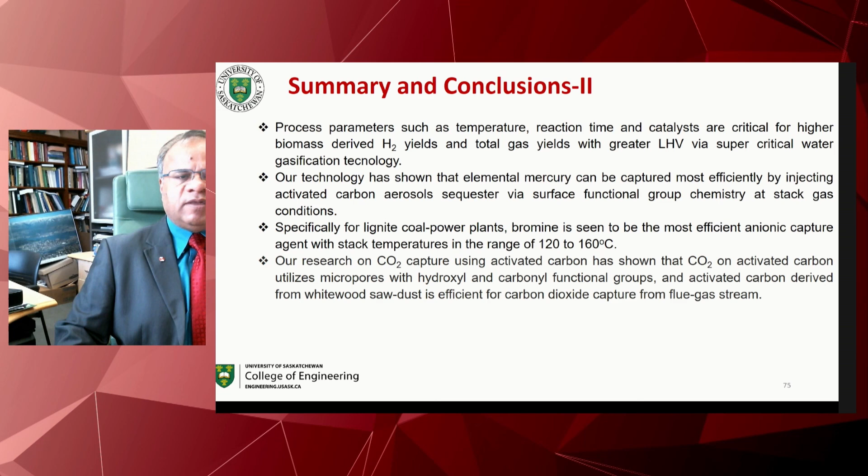So what is the take-home message? Biomass is a resource pool for sustainable clean energy and biocarbon production for economic and environmental benefits, and it is more or less uniformly distributed over this planet.

The investment in bioenergy production is increasing day by day. Appropriate bioprocessing technology should be applied for clean, sustainable energy production and emission control materials, depending on the availability and nature of biomass and product demand, to meet the Paris Accord and now the COP26 agreement.